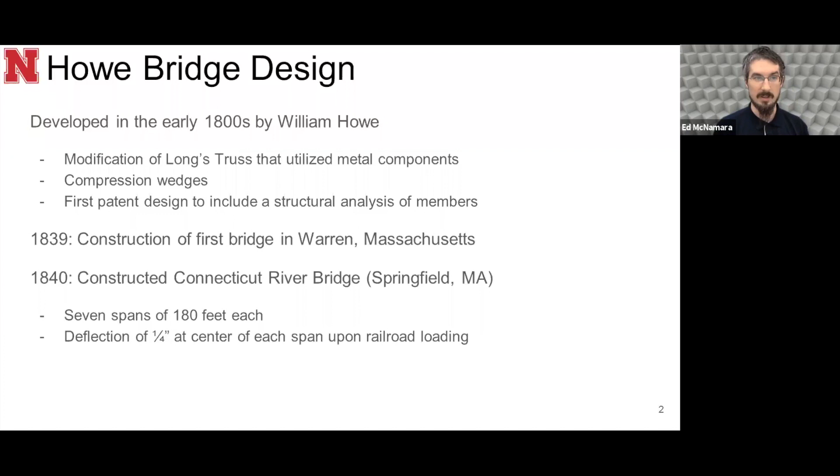The bridge that we specifically referenced for this project was the Polk County Covered Bridge, also known as Owens Covered Bridge from the farm that it came from. It is located currently in Easter Lake Park near Des Moines, Iowa, which is a bit of a distance for us, but not enough that we can do it in a day trip and go check out our bridge.

The bridge itself was constructed in 1887, but was relocated in 1939. Somewhere along the way, the covered aspect of the bridge and the moorings and foundation were replaced. But the truss system is original and is typical of late era Howe truss bridge design that used timber wood beams, tension rods, and steel compression wedges.

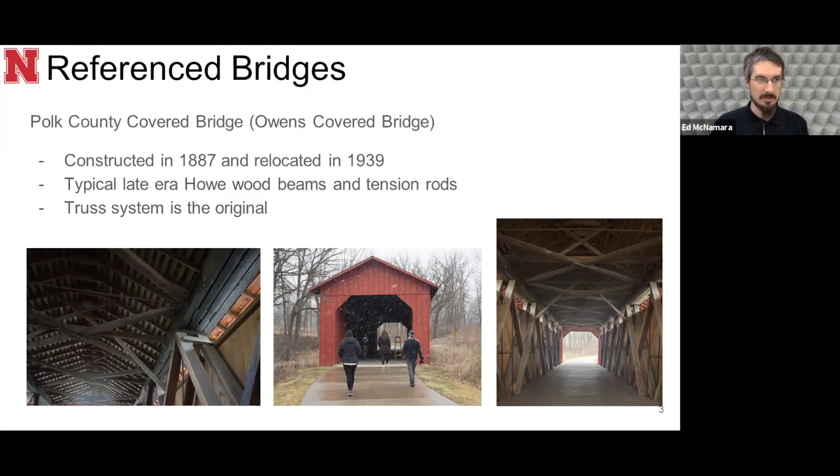As we were looking into the Polk County Bridge, we discovered that there was another bridge within an easy drive distance that was of a similar design, being also the Howe style. So we also went to check that out as a reference.

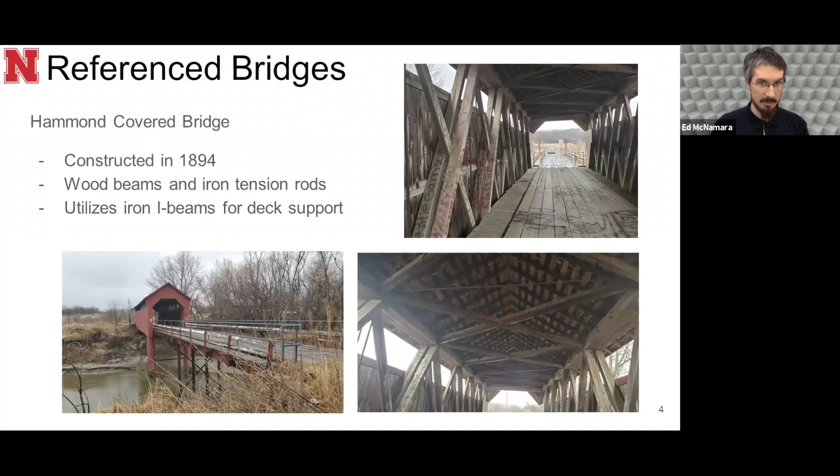This bridge was the Hammond Covered Bridge. It was constructed in 1894. In addition to the iron tension rods and wooden beams, it utilized iron I-beams for its deck support, and we couldn't find out enough details to confirm how much of it had been replaced with time or how much of it was still standing.

But the contrast between the Hammond and the Polk County Bridge gave us a chance to notice some distinguishing areas for potential problems, and those were basically the wood, the metal, and the surroundings. The covered bridge aspect of the typical Midwestern bridge was in response to multiple freeze-thaw cycles throughout the year.

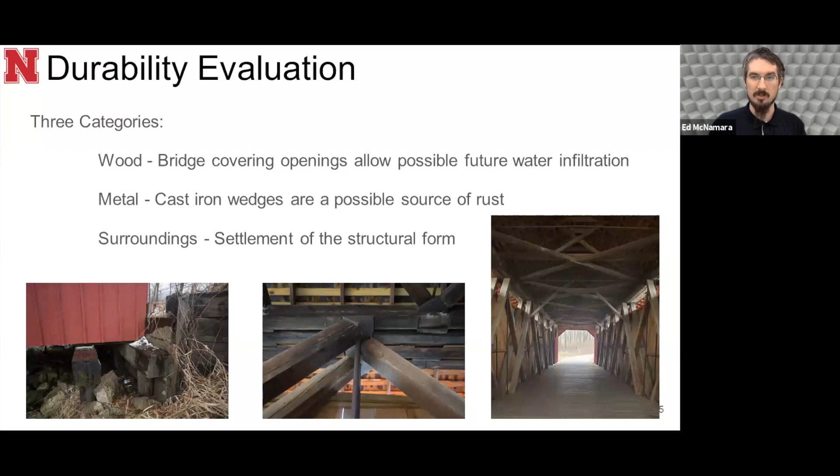These cycles require that the truss be protected from the elements more consistently. The main problem is that the truss should not come into contact with a lot of water, and the bridge covering prevents that, allowing itself to be the sacrificial aspect of the bridge. For the wood, too much water infiltration can cause rot, especially if neglected, particularly at the joints. For the metal, it's a similar problem, a possible source of rust should water and debris accumulate. Lastly, for the surroundings, as water flows underneath the bridge, settlement can cause the structural foundations to weaken. Those were the main points we looked at for the durability of the bridge.

After we went and saw our bridges, we came back and set about doing analysis on a 3D model, based on the drawings that we got for our Owens Covered Bridge. We used 3 different methods of analysis.

The first being the rules of thumb found in the 1893 Civil Engineers Pocketbook. We also conducted a static analysis using historic empirical methods, including method of joints and method of sections, which can be referenced in a practical treatise on bridge construction.

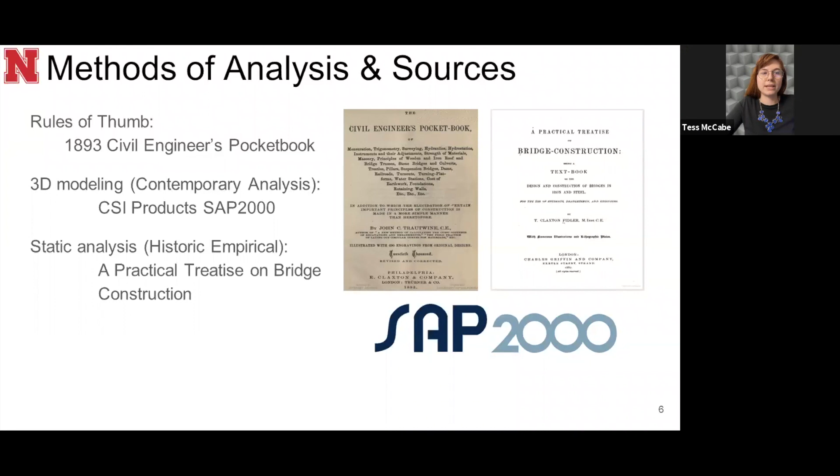And we also created a 3D model using SAP 2000. SAP 2000 stands for Structural Analysis Program 2000. We used SAP 2000 to create a 3D model of our bridge and got internal forces of our members from there. Next slide, Ed.

The first thing that we did after that was to derive our loads. We referenced ASCE 7-16 for both the load types and possible load combinations that our bridge would be undergoing. And we based the loads off of their respective sources. So for our contemporary analysis, we based the loads that went into the load combinations off of ASCE 7-16, because we were analyzing the bridge as if it were built today following today's building codes.

For the historic empirical analysis, we based our loads off of what we could find in A Practical Treatise on Bridge Construction, because the loads from there were from the loads of when the bridge was built. Over on the right, you can see the different load combinations that were given to us by ASCE 7-16. So we went through and used all of these load combinations, but we varied the type of load, the amount for each load, based off of whether we were doing the contemporary analysis or the empirical analysis.

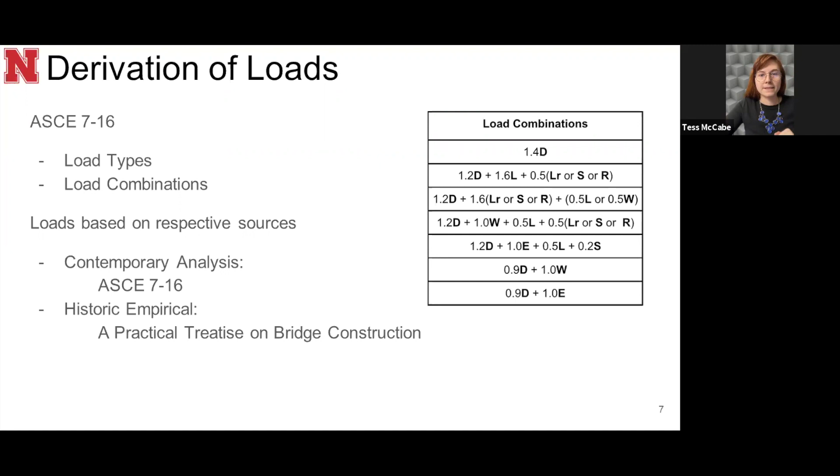Next slide, Ed. So as you can see here, we have the controlling load combination for the contemporary and the historic empirical loadings. At the top, you can see how the dead, live, roof live, snow, wind, and rain loads factor into the controlling load combination. And you can see the difference in those loads between the contemporary loading and the historic empirical loading.

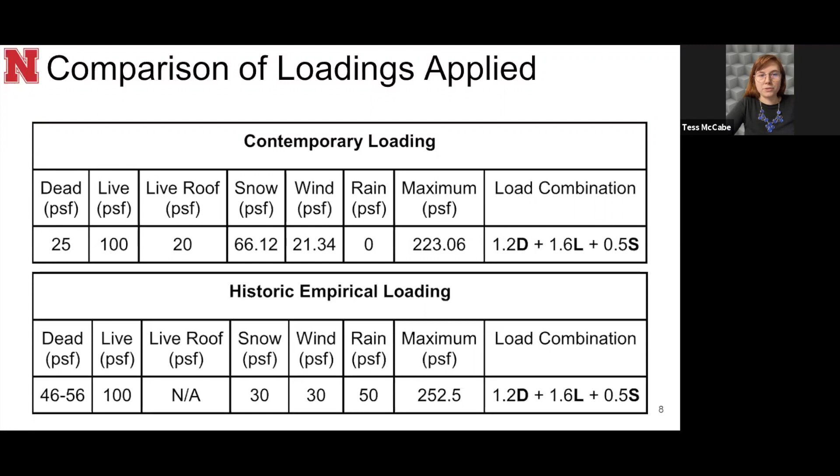And interestingly enough, we did end up with the same controlling load combination for the historic empirical and for the contemporary loading, even though our maximum loading for the historic empirical was just a little bit higher than our maximum for the contemporary. And you can see how our dead loads are different than each other. Our live loads are the same. The historic empirical did not take into account any roof live load, and the rain load for the historic empirical was higher than the contemporary load as well.

So we then moved on and used the Civil Engineers Pocketbook of 1893, which has a very prescriptive design for bridge design. And so it first asks, are you designing a double road or a single road? Similar questions like that to narrow down which direction to send you in design. And so one of the things that we noticed is that it specified larger tension rods than what we would prescribe today. And it limited the maximum stress to less than 800 PSI for members.

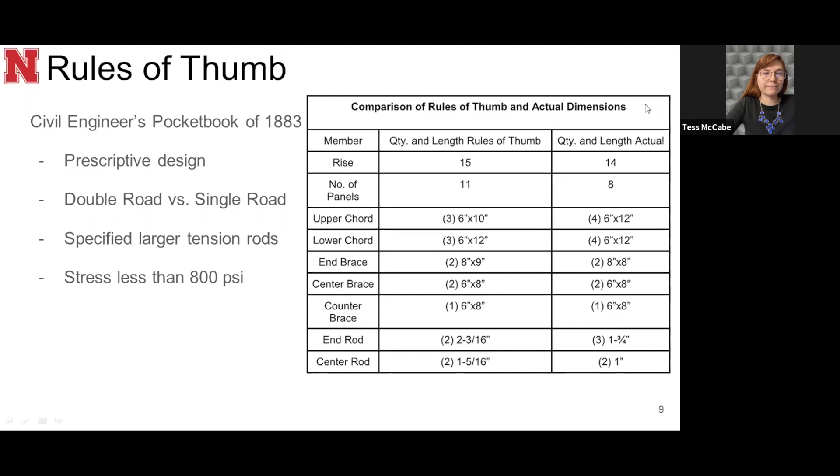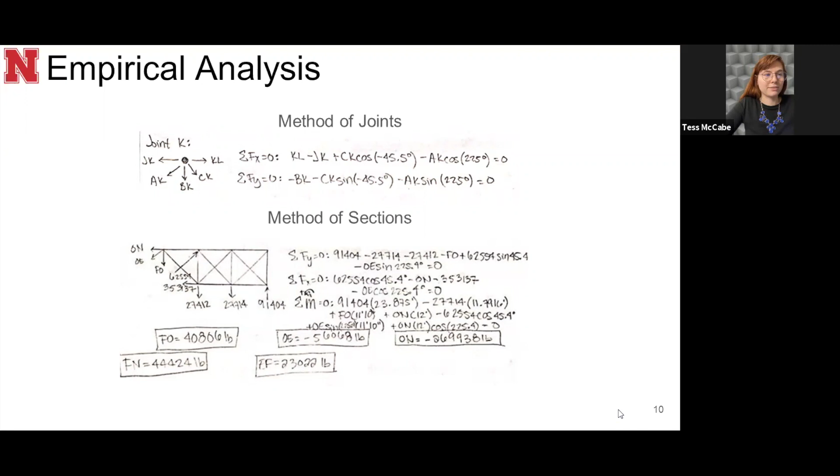Over on the right, you can see a comparison of the rules of thumb and the actual dimensions of the bridge that the Civil Engineers Pocketbook would have prescribed for us. And then here for our empirical analysis, you can see some of our hand calculations for the method of joints and the method of sections. We used both methods for solving for the internal forces inside each member of our bridge. And if you would like to look through that, there are 8 pages of delicious hand calculations available for you in our report.

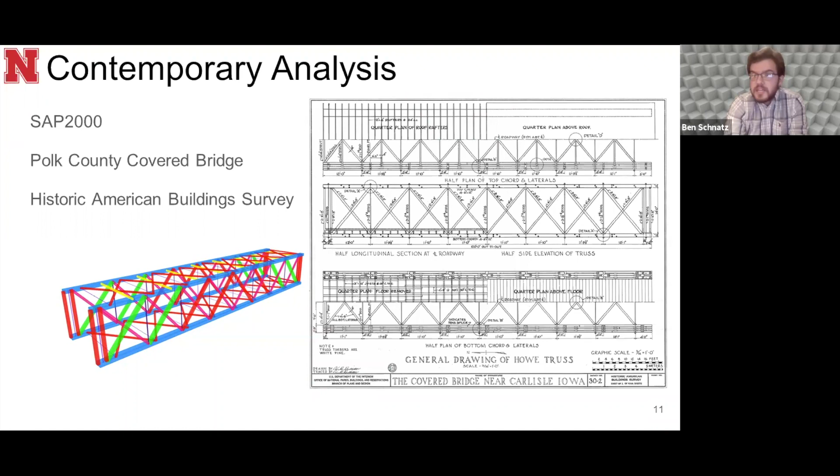So as Tess said, for the contemporary analysis, we used SAP 2000, in which we were able to construct a 3D model of our bridge. So that model was based upon the dimensions that we took from our site visit to the Polk County Covered Bridge, as well as these plans that were put out by the Historic American Buildings Survey, which actually measured the bridge as well and developed the set of plans, which we accessed through a government database. So in SAP, as I said, we were able to develop a 3D model, and we were able to place our loading upon that bridge.

So we placed a load of 223 pounds per square foot, and so we broke that down into a per foot per chord basis. So we applied 2,100 pounds per lineal foot per chord at the bottom. And under that loading, we were able to determine a deflection of 0.84 inches downward. Then SAP was also able to give us figures in which we were able to determine the internal member forces. So in the compression and tension diagram shown at the bottom, the red represents compression and the blue represents tension.

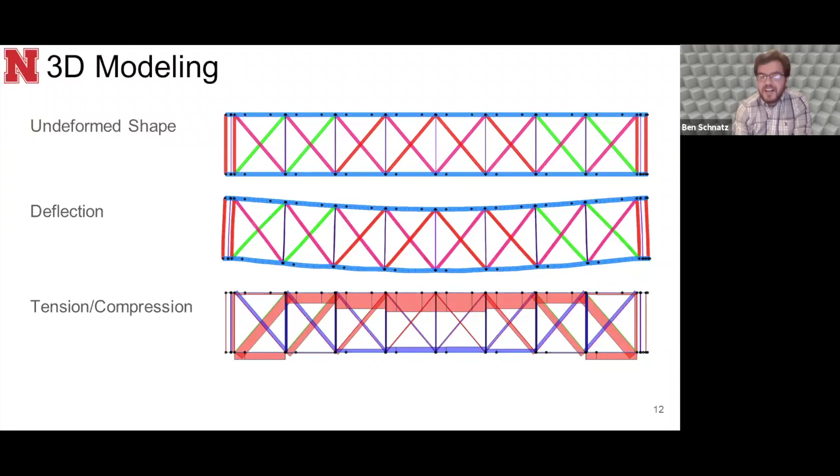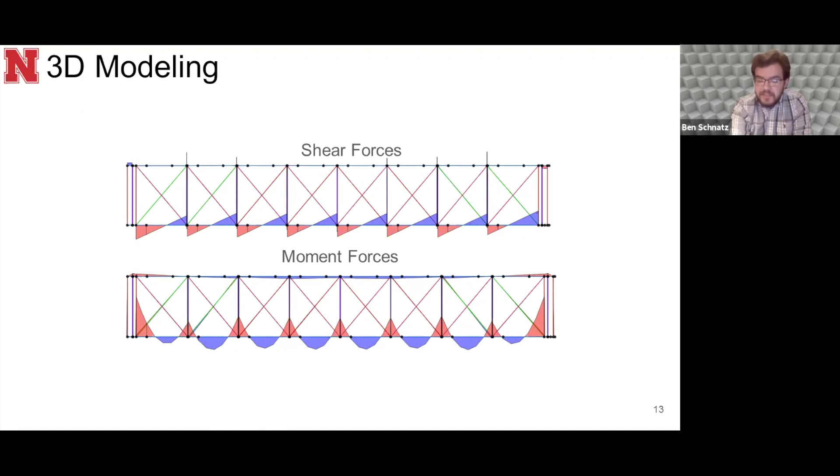At the top chords, the max tension was found, at the cross bracing, the maximum compression was found to be 670 pounds per square inch, and the tension rods, it was found to be 6,800 pounds per square inch. SAP was also able to give us shear force diagrams as well as moment force diagrams, the red being the positive shear and moment and the blue being the negative. The maximum shear found at the ends was 15,000 pounds under our loading, and the max moment at the ends was found to be 47,000 foot-pounds upon our loading.

So from our SAP model, we used that to determine our ultimate load carrying capacity. We looked to the member properties to determine our breaking points. So using the Forest Products Laboratory Wood Handbook, it told us that our bridge being made of white pine had a 440 PSI stress perpendicular to the grain and a 4,800 PSI stress parallel to the grain. The wrought iron had a max stress of 34,000 PSI.

So then comparing that with our design loading, looking at our tension rods, the pink purples at the bottom of the chart there, we were well under that. So our problem members would be in the members which would receive perpendicular loading, which would be our blue members. So under the design loads, our blue members were under 570 pounds per square inch of stress. So we deemed it necessary to take that number down to the 440 pounds per square inch limiting.

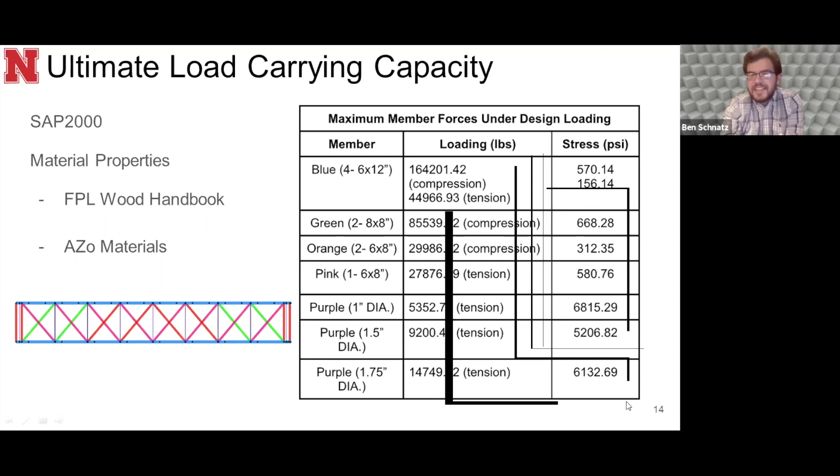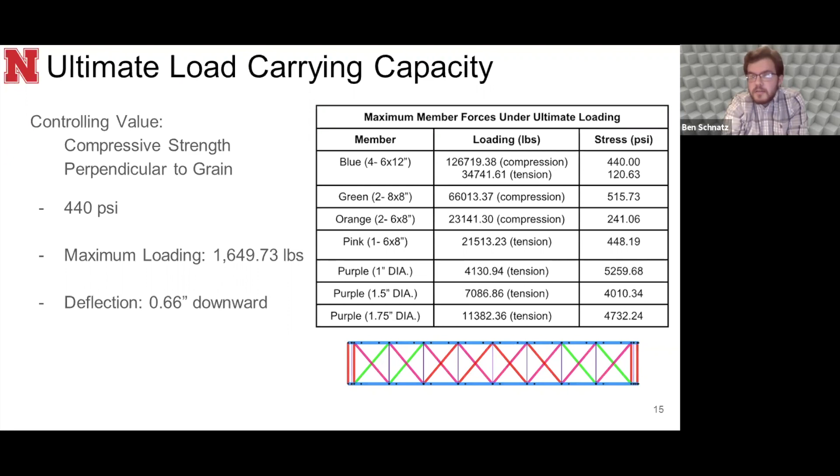So using SAP, we were able to go through multiple iterations in order to achieve that stress in those blue members, in which we were able to determine our maximum loading to be 1,600 pounds per chord. Under that loading, the deflection was found to be 0.66 inches downward. After we went through and did all of our analysis in SAP and using the engineer's pocketbook and empirical analysis, we then had to transition from analysis to design for phase 3.

And so we had to take our model of the Polk County Bridge and translate it into something that was constructible for us while still retaining structural integrity. So we used our SAP model to determine which members needed to be stronger than others because they were carrying more load. And then from there, we idealized our bridge model by removing tension rods and compression blocks and simplifying our chords and cross bracing on all sides to create a bridge model that we could construct ourselves.

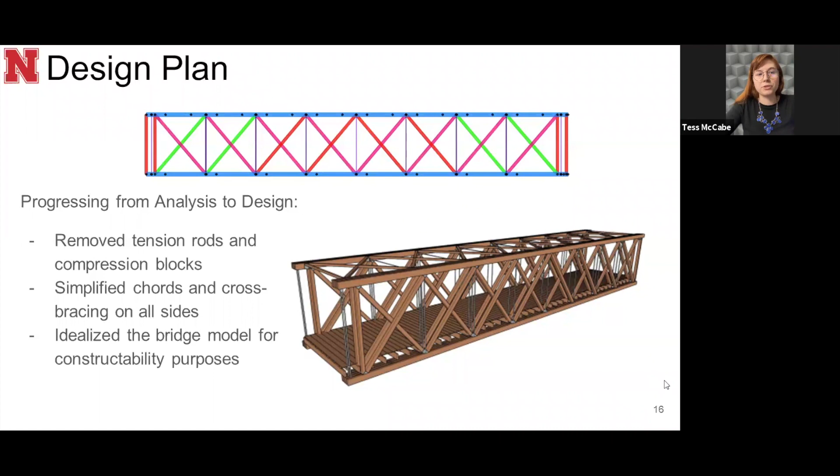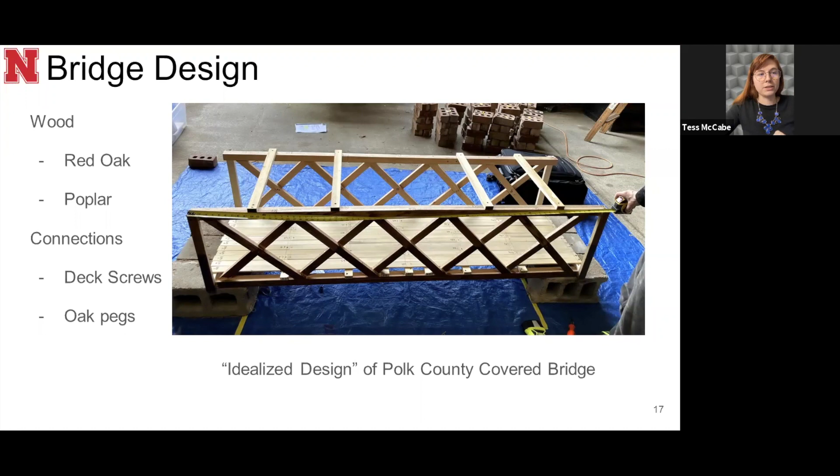And then on this slide, you can see our idealized design of the Polk County Covered Bridge. We used red oak and poplar for our wood choices. Red oak because it had the strength that we needed per square inch, and poplar because we could find it in the dimensions that we needed, and it was light enough that it would work for our decking. For our connections, we used oak pegs for all of our connections for our decking, and then we used deck screws for all other connections.

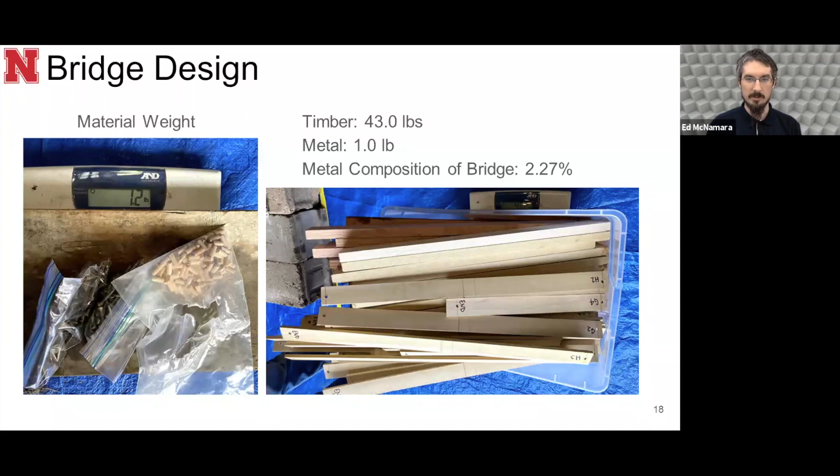Next slide, Ed. For our material weight at the end of the construction, we ended up with 43 pounds of timber and a measured 1 pound of metal, coming to our metal composition as a weight of the overall bridge of 2.27%. That number can be a bit misleading because we included excess screws for our actual build so that we would not have to scrounge or fight for that last one, and we had quite a few screws left over.

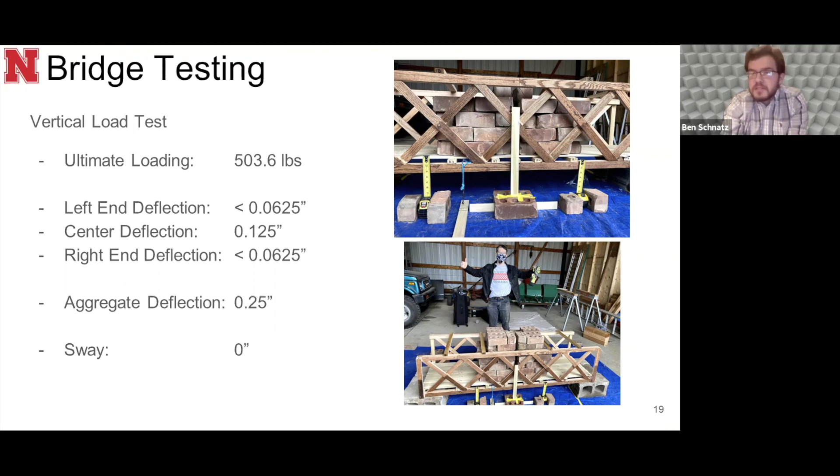So per the specifications, we had to do a vertical load test as well as a lateral load test on our bridge. So in order to do the vertical load test, we measured out 500 pounds of bricks in which we were able to load in 2 piles upon the deck of our bridge. We measured the deflection at 3 points, the left and right end deflections being less than a 1/16 of an inch upon loading and the center deflection only being 1/8 of an inch. At the same time, we also looked at our lateral sway as we were loading it, which came to be 0.

Under the lateral loading, 2 of our members held each end of the bridge while 100 pounds was placed on the deck. At the same time, a 3rd member pulled horizontally on our bridge with a scale which measured a force of 38 pounds. We were required to pull 35 pounds on it, but it was measured with a luggage scale, so to account for inaccuracies, we went a little over. And under that loading, the sway was still found to be 0 inches.

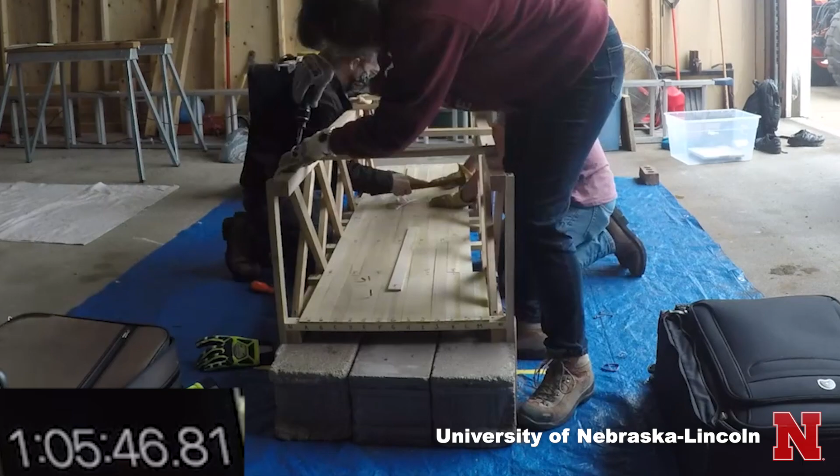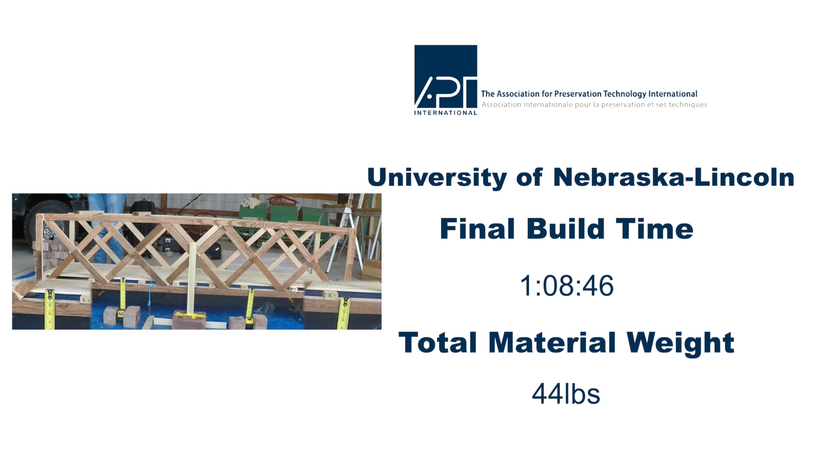Hello, we are the Columbia GSAPP Historic Preservation Team, and we will be presenting on the Beaverkill Covered Bridge. This team consisted of second-year Masters of Science students in Historic Preservation, Bruno Elias, Katie Foster, Emily Kahn, Will McCallum, Tom Rice, Tucker Simmons, and Madison Story, and PhD student in Historic Preservation, Anna Gasha. The team comes from an interdisciplinary background, containing 1 engineer, multiple architects, a historian, and individuals from other allied disciplines. In this presentation, we will provide an overview of the bridge's history and design, structural analysis, and durability, and discuss our building and testing process.

We modeled our bridge off of Beaverkill Covered Bridge, hereafter BCB, in Sullivan County, New York. Built in 1865, this bridge is an example of the Town lattice truss, which was patented by architect Ithiel Town in 1820. Consisting of closely spaced wood plank members laid diagonally across each other and attached with wooden pins at every intersection, the Town truss was a significant development in early covered bridge design, as it allowed bridges that could span long distances with less skilled labor and weight than the Burr truss.

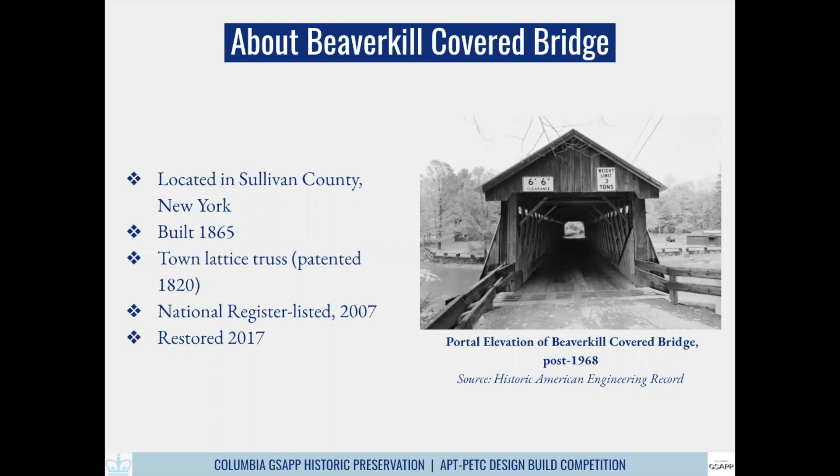BCB was listed on the National Register of Historic Places in 2007 due to its significance in bridge engineering and role in developing the surrounding town. It underwent an award-winning restoration in 2017. The primary reason we chose this bridge was for its historical significance as a representative example of surviving historic covered bridges in New York State.

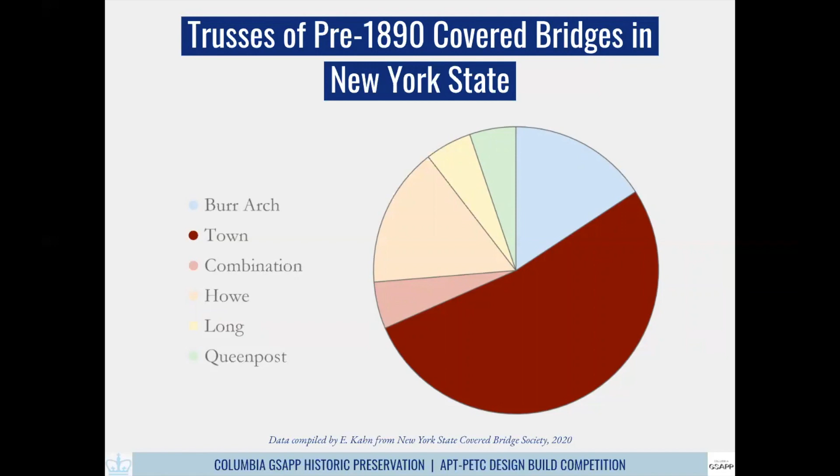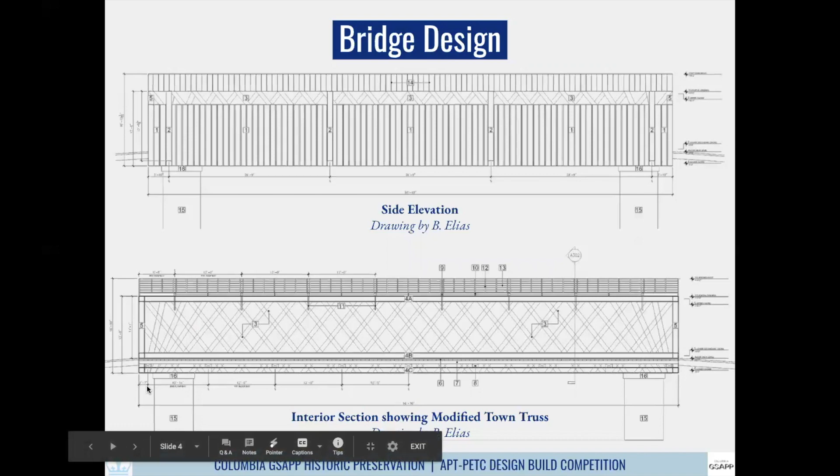The Beaverkill covered bridge is a variation on the patented town truss with 4 radiating planks at the end of the truss to distribute shear forces at the supports over a series of members, eliminating the need for bolster beams or abutment seats. For the structural analysis of BCB, we used Rhino and Grasshopper with the Karamba 3D finite element analysis plugin.

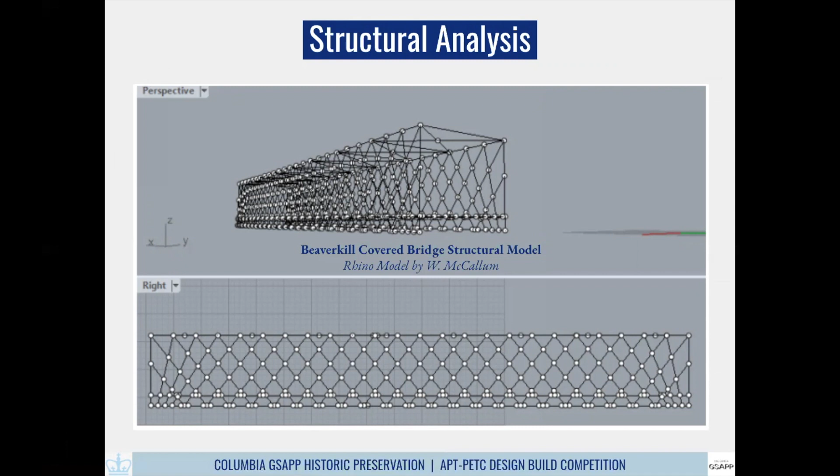The structural analysis considered dead and live loads, as well as snow and wind loads based on the BCB's geographic location. Contemporary bridge standards, such as the Wooden Bridge Manual for the U.S. Department of Agriculture, were used to gauge the serviceability of the Beaverkill covered bridge.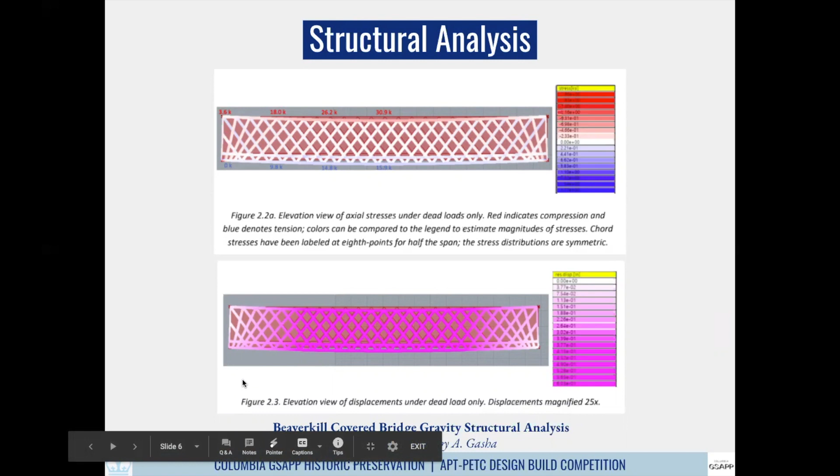For gravity loads, the bridge performed well in terms of serviceability, with displacements of L/470 for live loads and L/380 for live and dead loads. These show decent factors of safety over the recommended maximums of L/360 and L/240, respectively.

Under lateral wind loads, the bridge model showed significant deflection. However, at the actual BCB, this deflection would be counteracted by the buttresses, spaced evenly along the outer walls, the steel rods tying the truss together at the top chord, and the knee bracing of the roof structure. As a final note, the trunnel connections used at the vast majority of joints in the bridge were not examined in detail with this modeling.

However, based on the axial loads that would be transferred in shear through the connections from our analysis, it's anticipated that trunnel failure is a critical mechanism for potential failure and should be part of inspection and maintenance plans for the structure.

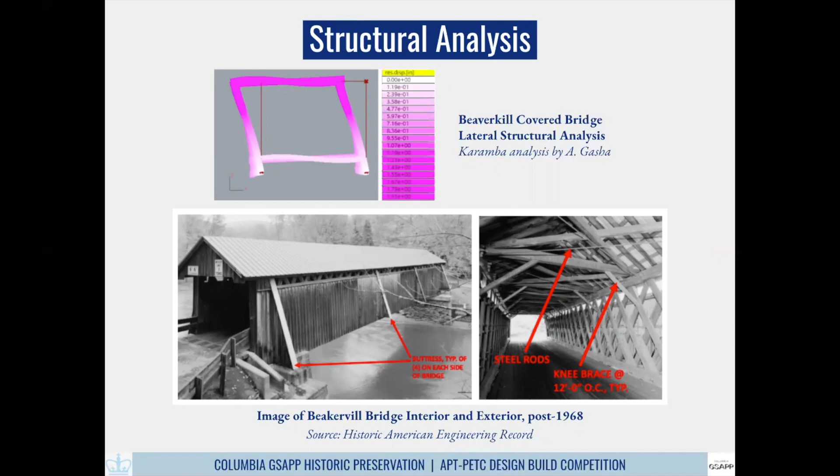Based on a conditions assessment conducted via Google Maps per COVID-19 restrictions, the Beaverkill covered bridge appears to be in good condition with no reverse camber. However, the siding does appear weathered, and some potential isolated deterioration may need to be addressed. Wood decay is a typical decay mechanism for covered bridges, and town lattice trusses commonly experience decay at connections, among other issues. Finally, hemlock, which the Beaverkill covered bridge is constructed of, has low decay resistance.

With those things considered, potential isolated deterioration that may require structural intervention in the form of member splicing or replacement may need to be addressed pending a more thorough inspection. Because of these issues, yearly inspection and maintenance are central to the bridge's long-term preservation. This should include the removal of vegetation and debris, inspection of roof and siding boards, inspection of concrete abutments, and snow removal. The bridge was historically unpainted, so a coating should only be considered following repeated board replacement.

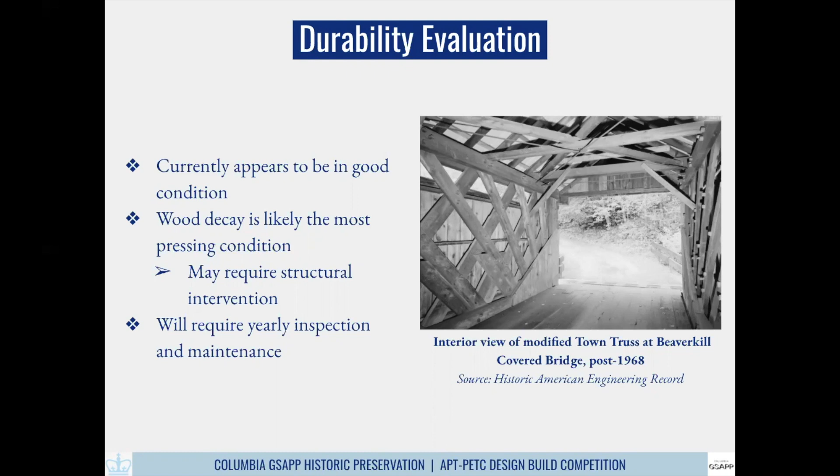The main takeaway for us from the building process is a deeper appreciation for the craftsmanship and construction planning and skills required. Even though the town truss was meant to reduce the amount of skilled labor required, we found that managing the connections that had overlaps of both chord members and 2 diagonal webs going in different directions was very tricky and hard to plan for with our limited background in carpentry and the institutional guidelines for gathering in New York City and specifically Columbia University.

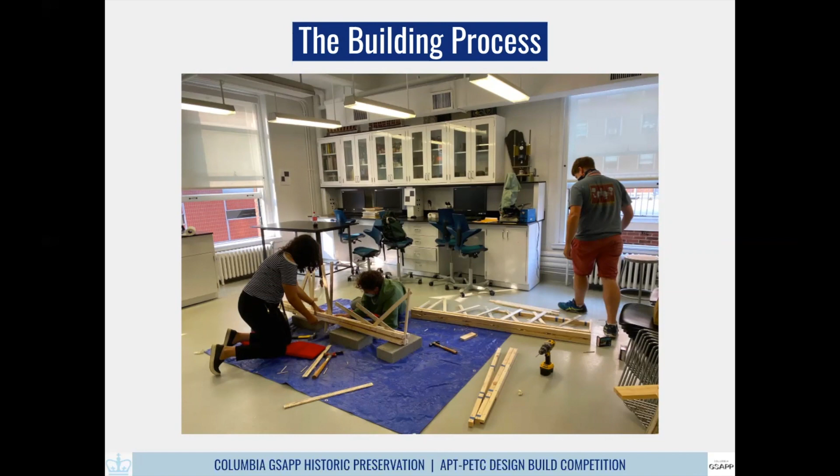Our build took us a lot longer than anticipated, largely because we had to find workarounds due to connections not working out as anticipated. The trunnel connections were especially difficult due to the fact that scaling them down made them fairly slender elements that tended to buckle or snap as we tried to hammer them in. As we briefly mentioned in the structural analysis section, we had reservations about this in our analysis. We acknowledged that the contemporary modeling software does not accurately model traditional carpentry joints often employed for timber bridges like BCB.

We ended up modeling the truss with fixed joints, consistent with other computer model analysis of timber truss bridges in the literature, and since all connections in the actual bridge have at least 2 wooden dowels, which should minimize the amount of rotation. Beyond these theoretical considerations, the building process also made clear that trunnels were difficult to place consistently, which in turn made their structural capacity unreliable at times.

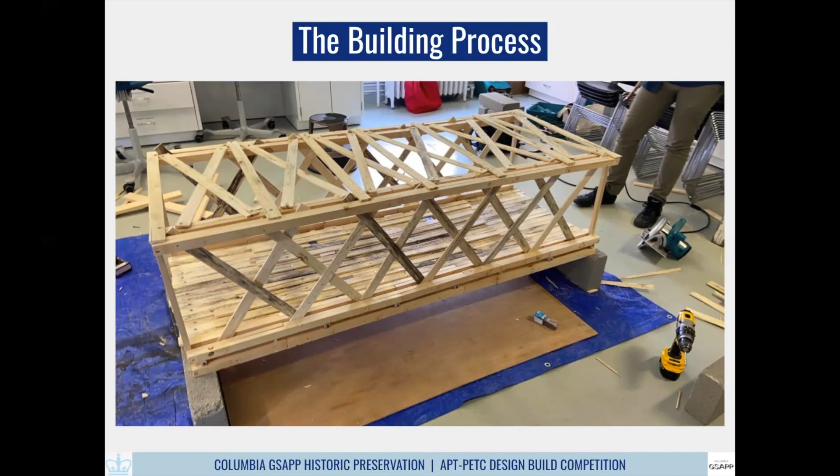Following the loading procedure from the competition specifications, our bridge underwent a sudden failure due to the trunnel connection, and the decking detached from the bottom of the bridge as we loaded. However, we decided to continue loading from the top of the bridge instead of the decking in a modification of the specifications, since we determined that there was, in fact, still a valid truss bridge load path remaining due to the fact that the bridge had 2 bottom chords and only one had failed.

We verified that the detached decking and lower bottom chord were not touching the floor in order to ensure that the load path was not counting on an additional support. So we continued loading the model at the roof level with weights. This demonstrated the relative robustness of the bridge construction despite the initial failure of the decking.

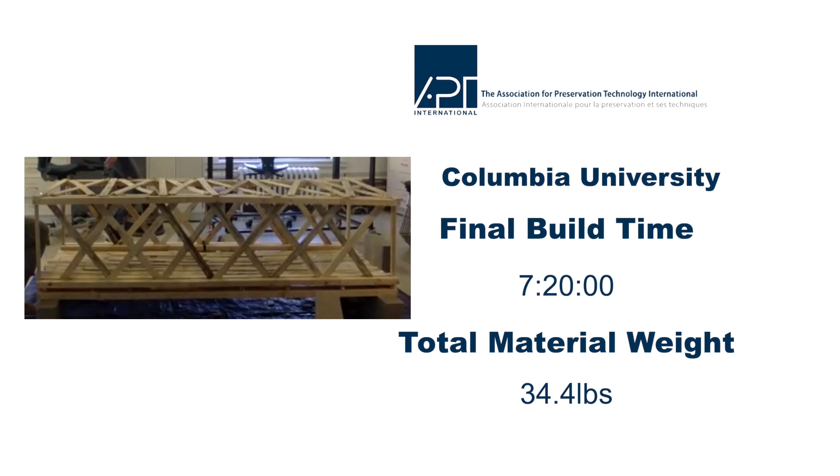Today we're going to be presenting you our research and redesign of the Moxley Covered Bridge in Vermont. When we started this competition, we designated certain topics to each of the team members. I wrote the historic code section of our research, Kelly Dodd and Jacquelyne Garcia examined construction materials and historic research, Maria Garcia performed a structural analysis on our design, and John Ruiz studied durability and preservation methods.

To help us, we had 3 professors from our university, Dr. Ginniga, Dr. Bailey, and Mr. Glusing. We also had Patrick Sparks from Sparks Engineering as our mentor. With the help of our mentors, we were able to see our project from different views, and their praise and criticism guided us as we made progress.

Located in Orange County, Vermont, the Moxley Covered Bridge stretches across the First Branch White River in Chelsea, Vermont. The structure material is comprised of timber with iron rods added for support. It was registered to the National Register of Historic Places on September 10, 1974, by the time the Preservation Act of 1966 came into effect. The Moxley Covered Bridge was one of the only covered wood bridges within a 7-mile radius to have survived in the town of Chelsea.

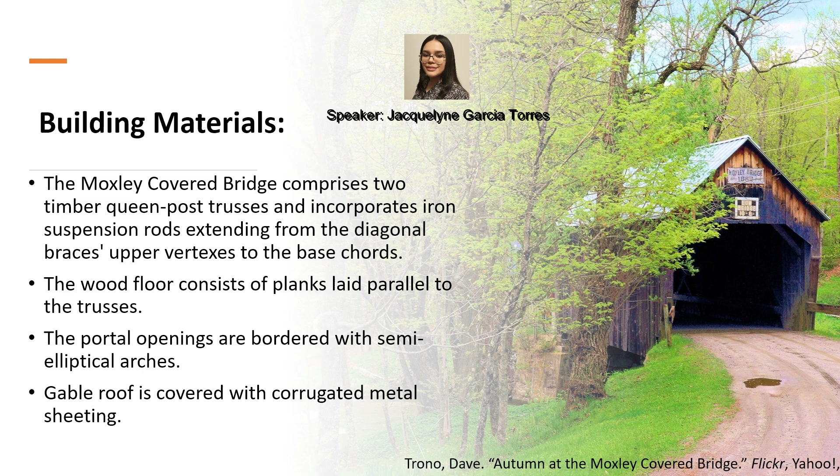Heavy timbers are set together to form trusses. The wood floor consisted of planks laid parallel to the trusses, sidewalls are sheeted with flush boards hung vertically, and the portal openings are bordered with semi-elliptical arches. The gable roof is covered with corrugated metal sheeting.

I'm going to talk about the structural analysis for our bridge. The relevant loads considered for calculations were a combination of live and dead loads. Dead loads consisted of self-weight, and live loads considered were older transportation methods such as a horse and buggy, along with newer methods of transportation such as a compact car. The purpose of comparing those two was to have a better understanding of the purpose of the first design and furthermore compare how these historic bridges can still be used today.

A combination of loads considered were snow, rain, and wind forces. Hand calculations were done by method of joints. The placement for the loading of the weight varied from uniformly distributed weights on the top chords, for example snow, to a single point load on the center bottom bracing or decking used in the bridge, which would represent a compact car. These hand calculations allowed us to see which joints of the bridge were going to have to be more reliable.

We decided to also perform a structural analysis using Inventor Professional 2017, in which we modeled the original bridge, selected the exact material, and placed different loads to see how the bridge would react. This gave us a clear understanding of deflections and allowed us to determine which members we would have to pay special attention to.

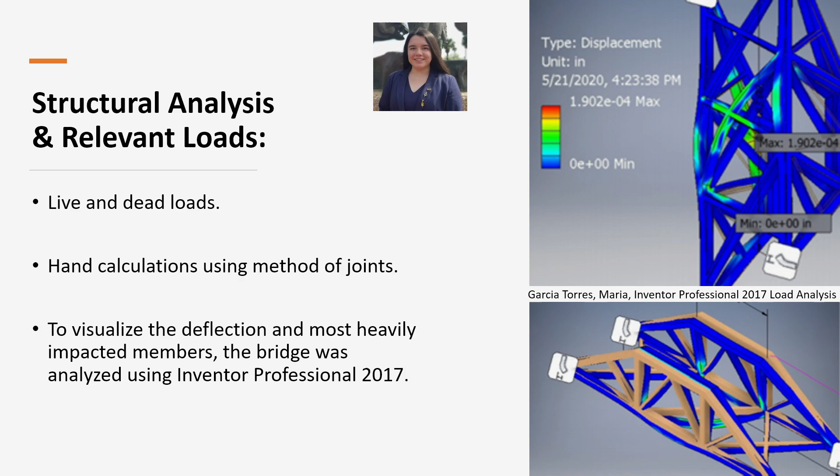For the historic codes portion of our research, I started searching for publishings made from Vermont and also called the City Hall in Orange County for any information I could get on the Moxie covered bridge. I was able to find a manual that Vermont uses for covered bridges, which provides support to those involved with maintaining and rehabilitating them.

This manual took a real deep dive into preserving timber bridges. It goes into depth about how to assess possible problems with the bridge and how to strengthen it so that we can keep them standing for as long as possible.

I also found an article published by two professors from Iowa State University. They performed an analysis on the bridge that went over its base structure and sizing, as well as testing they performed on the bridge. With this analysis, I could determine how the bridge reacts with its current use today. These articles helped me gain an understanding of why the bridge was built the way it was and what measures they took to preserve it for so long.

Hello, my name is John Ruiz, and I will be presenting the Evaluate Durability section of this project.

Now I would like to talk about durability. Being that this bridge is a covered bridge, we get a few advantages, with the most important being that the outside sheathing protects the wooden structural members and planks from the weather.

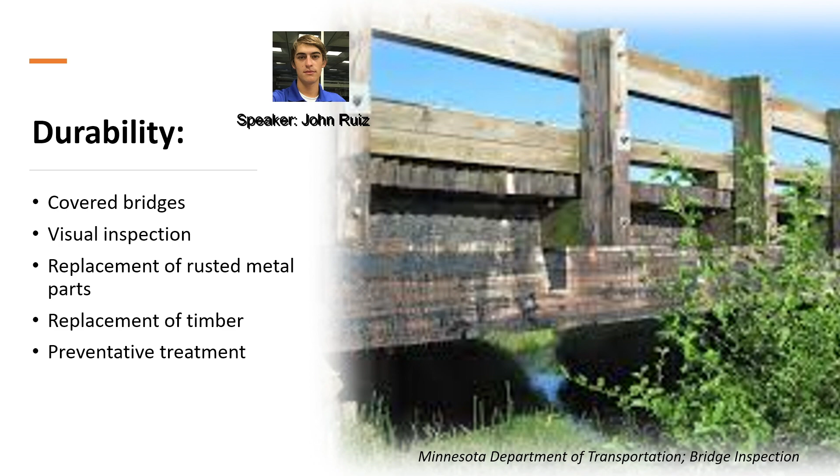Lastly, the wooden bridge faces destruction not only from natural elements but from termites and other foul insects. To counter this, using preventative maintenance such as spraying an insecticide to fend off any foul insects would be our best solution, as it would be the most cost-effective and safest way for the bridge to stay alive.

During the student design build portion of this project, we faced a few obstacles. As part of this competition, we were given certain parameters to stay within, such as height and weight requirements. To meet the weight requirements, we decided to remove certain members that were once included in our original design, and this helped with the efficiency of our bridge, but efficiency wasn't the only challenge we faced.

When we scaled the bridge to a 1:10 ratio, the length of the bridge was too short for the requirements, so we increased it to approximately a 1:8 ratio. This helped with the length of the bridge, but made the bridge too tall for the parameters, so that had to be adjusted for as well.

During the construction of the bridge, we load tested the mainframe and noticed that the mortise and tenon connection was separating. To compensate for that, we added a metal connection to secure it in place. Overall, through the obstacles we faced, we believe we were able to complete the challenge successfully.

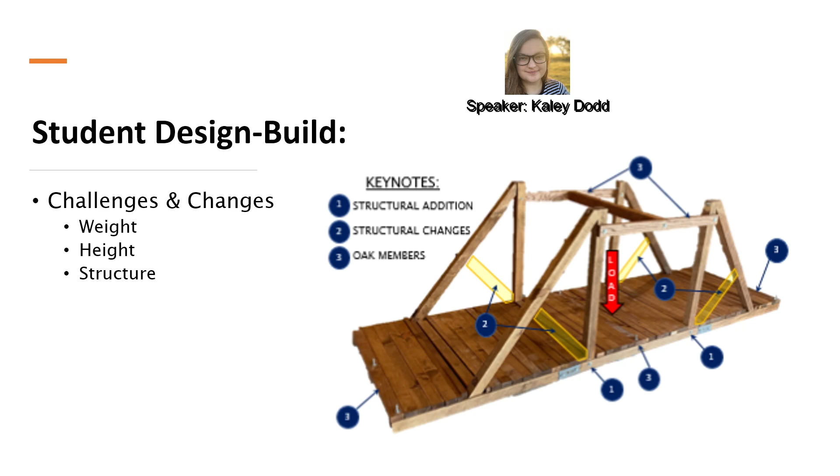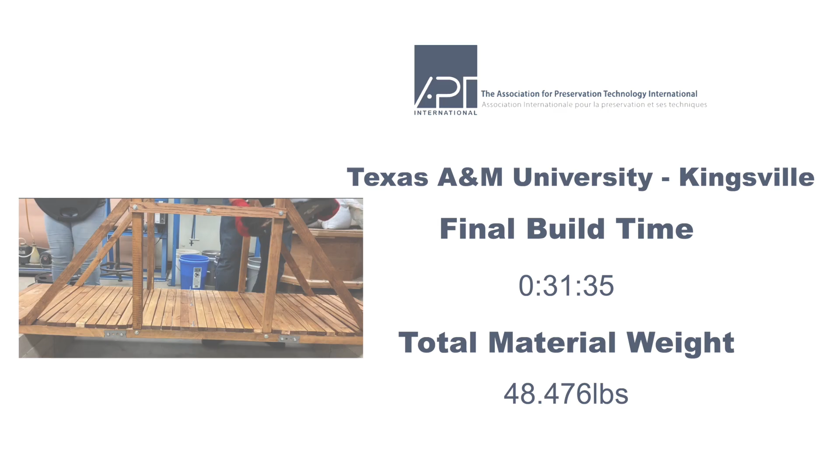Natalie Smith has been our team leader for this year. She's in the second year of her program in her Master's of Applied Science in Civil Engineering at Carleton. Renee Halle, as well as myself, Elise Hamp, are both in our second years of the Masters of Applied Science in Civil Engineering at Carleton as well.

Hoda, Osman, and Stephen Smoley are in their final years of their undergrad in Architectural Conservation and Sustainability Engineering at Carleton. Our bridge design was inspired by the Wakefield Quebec Bridge, which was built in 1915 and rebuilt in 1997 after it had been destroyed by fire.

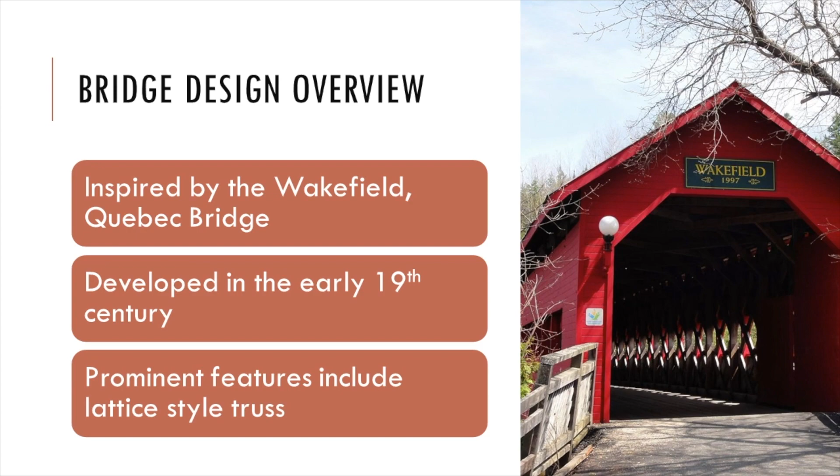This style of truss was developed in the early 19th century, with its prominent feature being the lattice style truss. A bit of history about the style: the town plank lattice truss was patented by Ithiel Town in 1820.

Its design consists of a web of light planks crossed at an angle of 45 to 60 degrees, with chord members at the top and bottom. Traditionally, the planks are connected at each intersection using wooden pegs called treenails, and the absence of bolts makes the Town's design unique, as it allows for more rigid connections, reducing the risk of the bridge to warp.

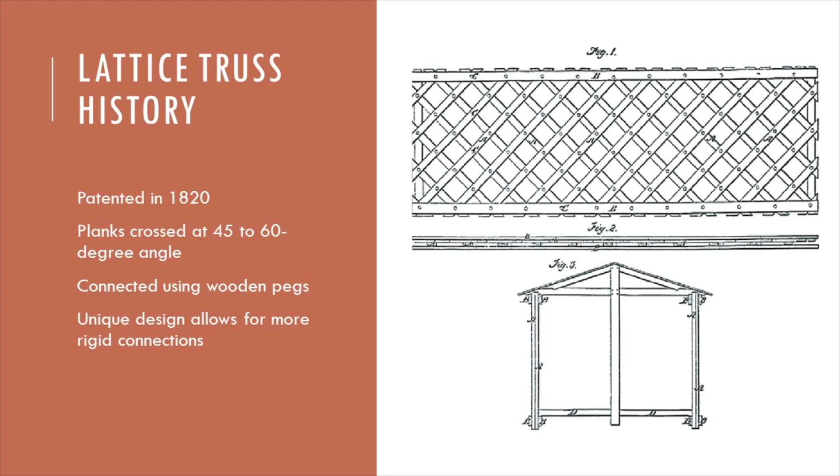Lattice trusses were popular in the 19th century because they used dimensional lumber as opposed to heavy timber, and they were easy to build. They have a high degree of redundancy because there are so many members, and there's a lot of load sharing in the structure. So if one of the lattices breaks, it can transfer load to another member.

However, these bridges do tend to have low structural efficiency, meaning that the weight of the bridge is quite large, sometimes compared to heavy timber bridges, because there is so much raw material.

The lattice truss design transfers the load to the supports through the lattices in tension and compression. The members closest to the supports have the highest axial forces, and the bottom chord acts in tension while the top is in compression. These chords were often doubled up to provide extra resistance to the high loads.

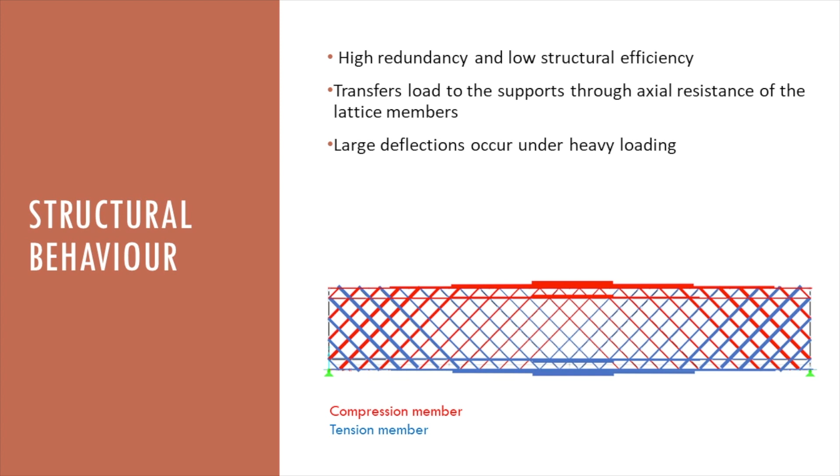Large deflections and out-of-plane twisting can sometimes occur under heavy loading.

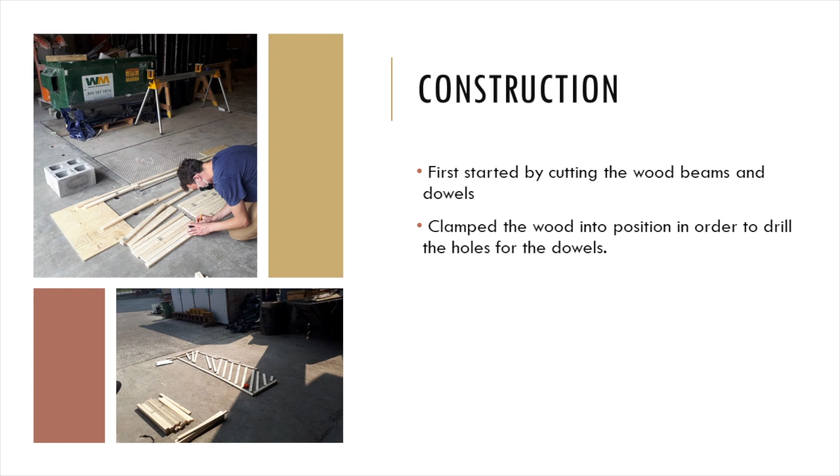For the construction of the bridge, the first step was to dimension and cut all the wood required. After the wood was cut, it was placed into position to confirm that we had all the pieces needed. We then clamped all the pieces into position in order to drill the holes for all the dowel and bolt connections.

In teams of 2, we placed the outside chords on the ground for each lattice and inserted the dowels into them. Starting from the inside of the lattice going to the outside, we inserted each layer of the lattice onto the dowels through the holes previously drilled.

The end post was then connected to each end of the lattice and fastened with bolts. Once both sides of the bridge were secured, we connected the floor beams to the bottom chords and tie beams to the top chords. Finally, the decking was nailed onto the floor beams.

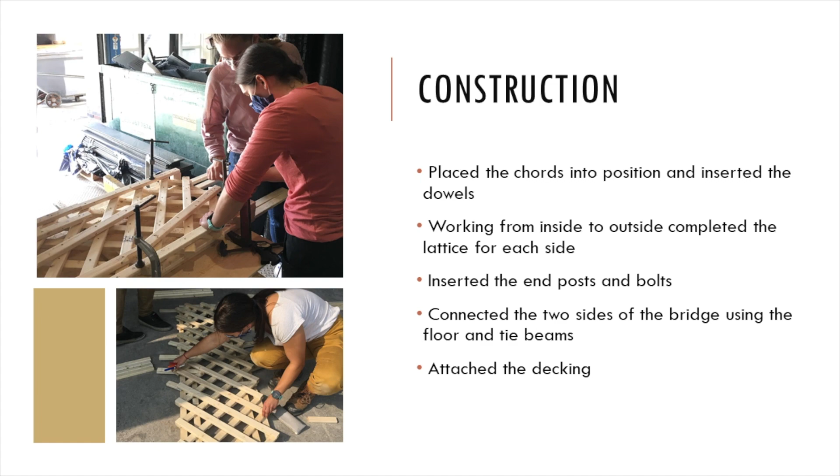As a group, we faced several challenges during the transition from phase 2 to phase 3. COVID delayed our material procurement, which resulted in rushed construction. We had challenges in the alignment of lattice members and end posts for drilling due to an initial lack of supporting structure.

We had to overcome a learning curve in our construction skills due to our current skill set. We had a challenge in the cross-beam connections, as they were designed last minute, which also presented itself during weigh-in. We also had a challenge with technology: several limitations in camera, video recording, battery lifespan, and setup.

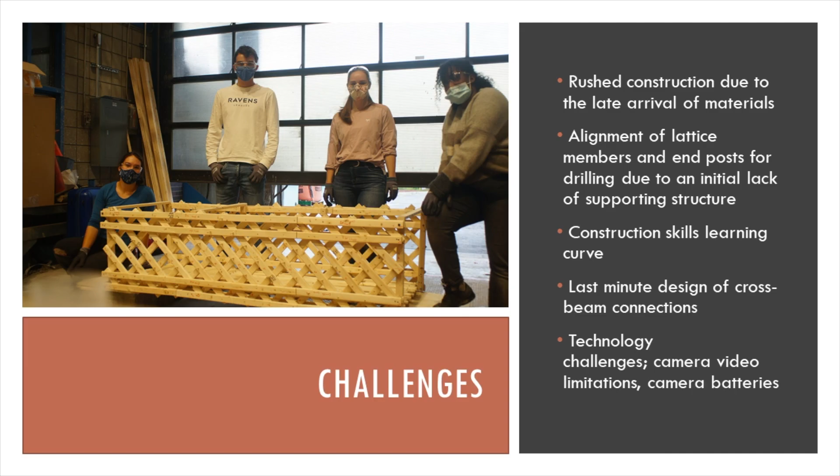In conclusion, we worked our way around project management basics. We learned to delegate, plan, and prepare. We also learned the application of timber design.

Lattice design was included in a lot of our redundant members. Therefore, the importance of design of connections and human error or feasibility of the design was a significant factor in the construction process. What we would do differently is redesign the crossbeam connections to direct forces directly onto the truss chords. We would also improve support structures used during the pre-construction and construction phases by the use of clamps.

What was important is that we developed an understanding of historic construction practices through hands-on experience. We use 90% wood materials by weight, therefore we do not rely on steel or modern materials to provide strength or elasticity. It was definitely valuable for getting hands-on construction and design practice, as students who primarily gain theoretical practice through university courses.